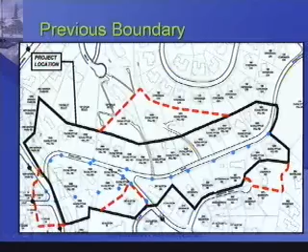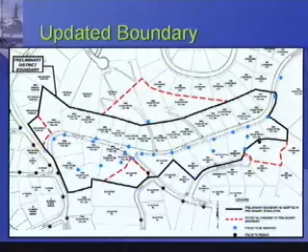I just want to make you aware of the potential of these boundary changes. Next time we meet, one of our goals is to have the assessment engineer's report updated, with the assessment engineer present, so we can talk about these assessment issues. But today's meeting, we're focusing on the utility design. Again, just want to make you aware of potential boundary changes, directly related to the assessment engineer's report.

Moving on to streetlights. As I mentioned, at the corner of Alston and Eucalyptus, there's an existing wooden pole with a cobra head attachment to the streetlight. If the project is approved and moves forward, it would be removed as part of the undergrounding and removal of the overhead system, and would need a replacement. It's at an intersection, so there's a need to have it replaced to illuminate the intersection for both vehicular and pedestrian crossing, as is the standard in the city.

The other streetlights shown are Marbelite or concrete poles with existing cobra head streetlights, and they would remain as is.

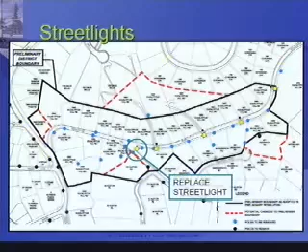So what we're talking about is the need to replace a light that would be coming down if the overhead utility system came down. The likely replacement style, subject to the review and approval of the ABR's jurisdiction, is the new Domus style. It's an efficient light with a cutoff lens that disseminates light downward, as opposed to the cobra head style which has side illumination. We're trying to have that light go downward to minimize light pollution and have more efficient lighting on the street.

So that's what's proposed, and again, it's subject to the approval of the ABR.

The good news is we've learned through the bidding process on the Cliff Drive project that it was cheaper to utilize the existing wire and convert the circuitry, as opposed to replacing it.

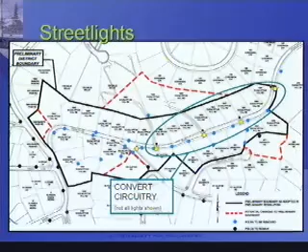With that, I'd like to turn it over to Jim Britch to let you know about the features of the design. I offer you to come to the back of the table here, so Jim can make his way through the utility design features.

Okay. Let's see. And okay, and okay. Well, we're gonna wait for just a minute till we convert to that sheet, but I will allow you to follow along. We have to convert the input to that sheet, and then we'll have to focus down.

I want you to look first. We've got this area here, right below all these hills. These houses are on the hill above Eucalyptus Hill Road, so their view plane is out in this direction. It's pretty steep. They do not see much of the street.

So when we're locating our meter pedestals, in this case this represents the meter pedestal that would allow the electricity used by the streetlights across the way to be metered and charged. That streetlight pedestal is being set down there.

Again, it's above Deer Path and below these residents, so it would be the least amount of view or aesthetic infringement possible. You've got a parking area alongside Eucalyptus Road where people can park. So what we intend to do is consolidate all the equipment that has to be above ground right there, and then probably put a couple bollards around it to protect it, maybe taking up half of one of those parking spaces. I know parking is at a real premium there.

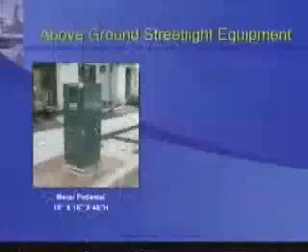I can show you what this particular meter pedestal looks like, as a streetlight pedestal. It looks like this. Essentially the electricity comes out of the underground, up into this meter, which has a disconnect here, etc. When the city charges this electricity, it pays its electrical bill, and the meter reader just reads it through this window. If electricians need to come out and work on the streetlights, they can go to this meter pedestal and disconnect the streetlights so they can work safely.

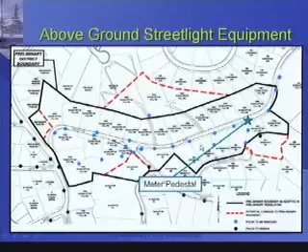The streetlights being fed by this across the way, the ones currently there, for you there would be really no change to the streetlights in this area. They'll look just the same, except they'll be run by electricity supplied this way instead of by this 6.6 circuit that comes clear over here from Barker Pass.

These streetlights would be fed from that meter pedestal. That's one piece of equipment being located there. It's the only thing you would see different in that area as we change those streetlights over.

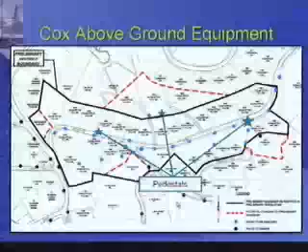With that, I want to go on to this view here, which I believe is our Cox above ground equipment. I'd like to mention to the neighborhood the reason we have to review these designs with you. Remember when Mr. Wagner first presented his SCE design, we had everybody take a look at that. There were some questions - can we do this, can we do that. A couple of individual property owners actually wanted the connection point for their property moved. Tom was able to change certain things and certain things he cannot change. When a property owner or the neighborhood makes a request to have something moved, relocated, or modified in some slight way, he has worked with you in the past to do that.

So once we got over that initial hurdle of sorting out the Southern California Edison design, Tom passed his design over to the Cox and Verizon people, and they looked at it from the same perspective, with an emphasis on minimizing any above-ground equipment they would have to install, and also on putting the demarcation points, the connection points for the Cox and Verizon equipment, right next to or as close as possible to the Southern California Edison connection point, so that property owners converting to underground would only have to put one trench on their property, and they could put all the conduits for the connection into that trench.

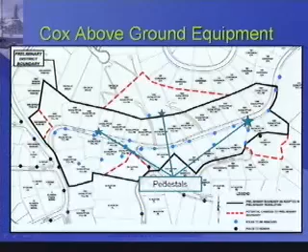So I'm going to look at this, and then I'll come over to that map in just a moment. I want you to notice this pedestal right here is a little bit larger - that's why Lisa has made this a larger star than these two. These two pedestals - let's go to the next slide, John - the two pedestals up there are Cox cable TV pedestals. They'll look just like that. They're very, very innocuous. When the technicians come out to work on this, they just pick this lid off the top, and then they can get all their equipment within this.

In working with the Cox planner, there is a possibility that this large pedestal would have to be located - and when I say large, notice it's only 48 inches high by 30 inches by 18. It's not that obtrusive. It would sit next to the streetlight pedestal that you saw previously in that same area. It's possible that it would be located where the parking area now exists on the portion of Eucalyptus Hill Road to the east of Alston Road. But Mr. Schwartzberg, the Cox designer, has told me that as he gets to the final design, he will attempt to replace this larger piece of equipment with a smaller piece, and feels there's maybe a 50-50 opportunity for him to be able to do that.

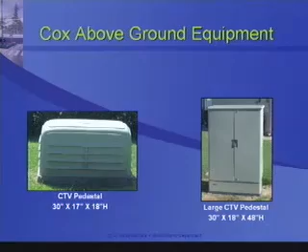So the point here, more than anything, is for you to understand the amount of effort and work that the Cox and Verizon planners put into this, minimizing any above-ground equipment for the neighborhood. Because we understand that the more we can get out of the visual view plane, the more suitable it's going to be for the neighborhood, and the more coordinated that's going to be with the goals of the neighborhood. I might also mention that Mr. Wagner, in his SCE designs, when plausible, put in vaults to put his equipment underground as opposed to above ground. But in some cases, you simply can't do that.

So, John, can we go back to the other map? This is the SCE above ground equipment, and we've looked at this at the last meeting. This, I believe, is a vault, and the stars here are a couple pieces of above ground equipment, transformer equipment that Edison has to have above ground. They have a lot of problems when they put this stuff in the ground, in vaults. If it's just a small piece of equipment, it's pretty costly to put that in the ground. And when they do put the vaults in the ground, you can see this would be the access to a vault here in the street. Then they have to have these air ventilation holes on the side also, which are a little bit visually intrusive - at least they're there, you see them.

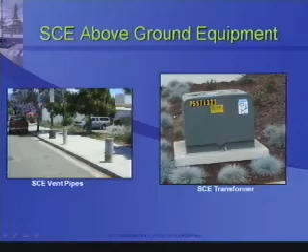Most of the SCE equipment we're representing with those smaller stars looks like this. We can landscape around it and disguise it in a number of ways, so it's very low, not huge above-ground equipment. The two vaults are here and here, and the smaller pad mount transformers are in these other areas with the other stars.

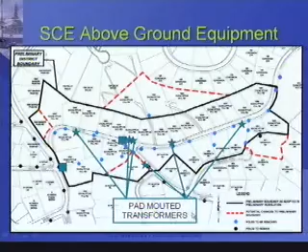Another good news for the neighborhood is that when we look at the Verizon design, I'll show it on this drawing over here. The Verizon design allowed them to put all of their equipment underground, which we were really happy with. They worked diligently to do that.

We're working with a designer out there named Chris Hakey. Chris worked on this and came up with a plan so all the above-ground equipment required for his system is outside of the neighborhood. So anything Verizon puts in, you will not notice. You might notice a small in-ground handhold, which is a connection point where a technician can raise the lid and get in there to connect and disconnect cabling, but that will all be below ground.

So with that, I want to step over to the map on the table and see if I can get Lisa to switch the input for the television viewers. I'll give you a run through. We can bring this down, and as we focus it, it becomes much more clear.

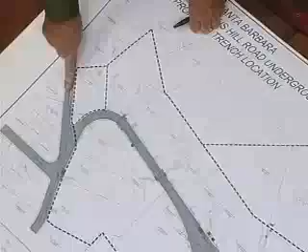A challenge for the Verizon people also was the Barker Pass Road area, and where Barker Pass intersects with Eucalyptus Hill Road. In this area, a lot of the circuits that come up here actually go out of the Chapala Street central office, so people living over here have a different phone prefix. This area, the area you live in, has the Montecito prefix, which is very desirable.

Verizon has worked very diligently to keep everybody in their existing telephone prefix, so that you would not have to change phone numbers.

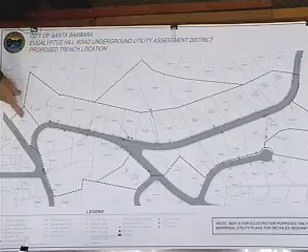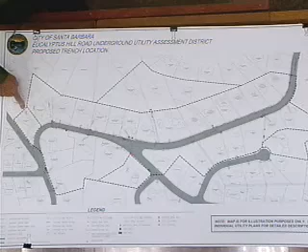There is a situation with a gentleman at 1840 Barker Pass Road. He has asked if he could convert or move his electrical feed. He currently feeds his electrical and telephone from Eucalyptus Hill Road, and he's asked if he can move that over to be fed from Barker Pass Road instead, and then be left out of the UUAD. I'm working with Mr. Wagner to determine what would be required.

He's currently fed his Cox cable from Barker Pass Road. But one ramification of that change would be that he'd have to change his phone number, because currently he's in the Montecito Exchange and he'd have to go into the Santa Barbara Exchange. That'll be part of his decision-making process.

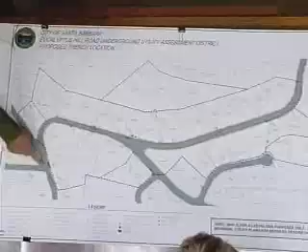I'm going to start on the westerly end of the project in this area here. This is the large vault that Edison will be putting in, right adjacent to Cedar Lane. Remember, all the circuits that feed electricity to this neighborhood come up Cedar Lane and are dispersed along this area, so that would be the transitional vault.

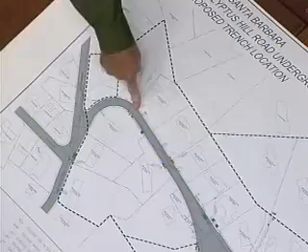That would allow the pole at that intersection to remain, but we would transition to underground, and the underground trench will feed that electricity underground around the corner and across the bridge to this area. Currently, that circuit is fed cross-country from here in a pole line that comes across and swings down like this, and that's part of the poles we're going to be eliminating.

So in this area, we would come with the undergrounding down across the bridge, and we would have a couple of mounts here.

Notice also it's a Verizon pull box and a Cox pull box. No above-ground equipment, really, just places where we can make these connections. We're coming across to this area, and each one of these little lines shows where the property would be connected to. When you see the T, it is a pull box or a handhold that the underground connects to.

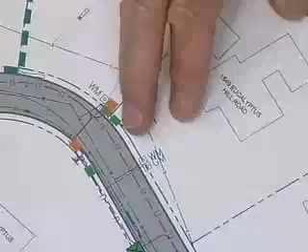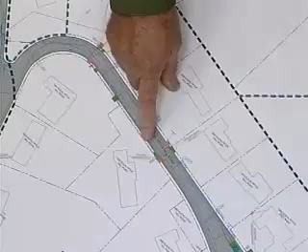For this house, should the project proceed, they would underground to that handhold, and that's where their conduits would meet the project conduits. We're going to go underground down here, and instead of crossing the street in numerous places, we also have a little underground run over on this side, with a couple SCE pull boxes or handholds along the way.

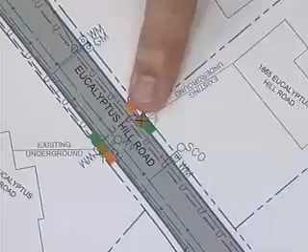So that's really the first place that we're going to see something above ground. We're proceeding down to this break-off with Alston Road and Eucalyptus Hill Road that proceeds this way. We notice here that we've got a large vault in the street that will allow us to make this changeover, and then we've got a couple pedestals here that we've talked about.

I know the property owners at 1865 have worked with Edison on that. They've talked to Edison and asked if there's any way that can be modified or changed, but unfortunately those pieces of equipment are going to have to set there because we've got so much equipment that currently comes into this pole across the street that we're removing.

Is there a possibility, let me know if I'm... Go ahead, yeah. Maybe putting these boxes near the property line. I see. Again, could you restate that?

My question was, why we would like to see the undergrounding go forward is that we hope the benefit to our property will exceed the assessment. So if we're spending all this money for a benefit, I'm beginning to question how much benefit I'm going to have by having a couple large green boxes, plus this vault, which is actually on my property, because I own part of the street here that is where the parking is. So I'm trading my view of the ocean for what everybody else is going to see when they look at the house.

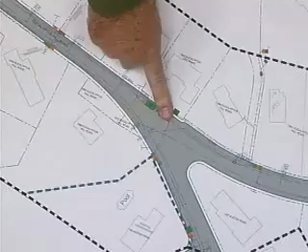If you look at this dividing point at Alston Road and Eucalyptus Hill Road, you'll note that we proceed across the street to Alston Road and down Alston Road to this corner. The streetlight shown right here will be replaced. It's on a wood pole now, and you'll see this much less obtrusive domus fixture that has downlighting, so we won't have a situation with that light radiating up the hills, this light pollution. We'll have that domus fixture installed there, and then this whole pole maze will come down.

These two poles are here, and we had talked about how we could gracefully treat this pole. This had been a question the neighborhood addressed in the past, and the solution is to come as far down Alston Road as we can, approaching Alston Place before we transition up. That gets, as opposed to just moving that pole 50, 70, or 100 feet, the conclusion was to come all the way down to the intersection, and that's where the district would end and the pole would go up.

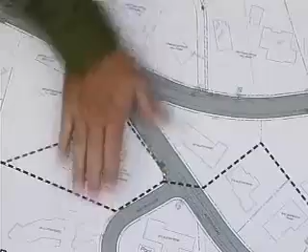That will be a partial benefit to 207 Alston Road because they'll have some of this clutter cleared out of the way, and all these properties up here will have this view perspective opened up to them. Mr. Wagner had that in response to neighborhood comments. That's not how he had originally designed it, but after listening to the neighborhood at the last meeting, those are changes he's been able to make that accommodate the neighborhood's desires.

If we look at how we proceed down Eucalyptus Hill Road going east towards Montecito, we have this road that runs up here, and a pole line that currently runs up next to 1895. That pole line carries the electricity that converts to underground at this point and then goes easterly down above this property line to feed all the houses downhill and uphill from there. This has been a very important pole for us to get out.

This area has been very important. There's no sense in taking these poles down if we're undergrounding, and then leaving that one pole standing. If we take this pole down, we have nothing to attach to. So, of course, we have to underground up this road.

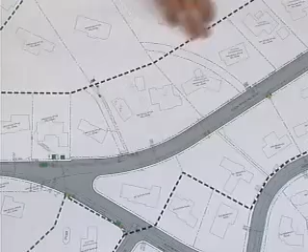We will intercept a current underground box that exists there and simply route into it to backfeed 1895, and to supply electrical and communication services to the properties above, and again reconnect all these properties down here to the circuit that's currently underground but fed by that overhead line. That's pretty straightforward, and you can see down here we have several pull boxes that will interface with that, but again, no above-ground equipment in that area.

At that point, we're going to cross the street because it'll be much easier to work on the lower, southerly side of Eucalyptus Hill Road, where we'll have that parking area, so we can have much less obstruction to traffic and much more area to work in.

We will proceed again easterly on Eucalyptus Hill Road towards Montecito, where each one of these purple stub outs you see, these little T's, will be replacing that overhead circuit and will allow the people on Deer Path to have that as their connection point.

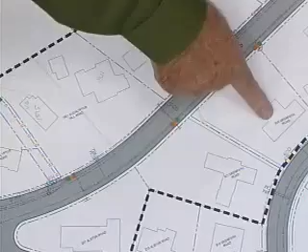Currently there are overhead wires running down there. There's a pole that sits down here that feeds a couple houses - I think it comes down like this and feeds these two houses. All that would be removed, and the new connection point would be up here in this area.

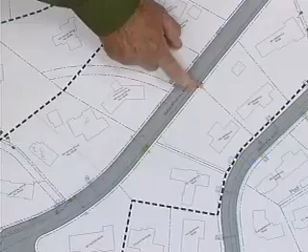Again, what we've done is locate that in such a way that we could consolidate, for example on this property line, all of the utilities in a single area and then Y out to feed the two houses. Again, nothing above ground there until we get down to this point.

This is where we have a pole line that runs between 1944 Eucalyptus Hill Road and 861 Deer Path Road. What that pole line does is come down the hill and feed 861, then goes down and connects to an underground box that runs over to 871 Deer Path Road.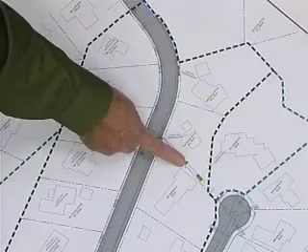That, of course, would all be undergrounded, and we would have other connection points. We'd do an intercept here to an existing underground, and have an intercept point there or a demarcation point where this residence, 361 Deer Path, could connect to. This whole pole line would come down.

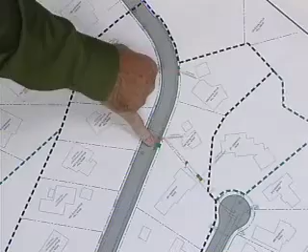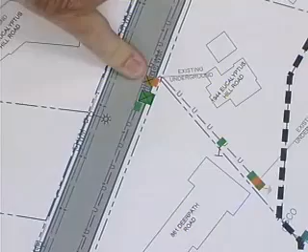We will have in this area, again, a couple pieces of above-ground equipment. We'll have an SCE pad-mounted transformer, one of the low green pad transformers, the smaller piece of equipment that was represented by Edison, a handhole, and the brown box here with the X in it represents that taller Cox Communications box that I said Mr. Schwartzberg is working on - he's hopeful but can't commit to it yet, so that could be a smaller box.

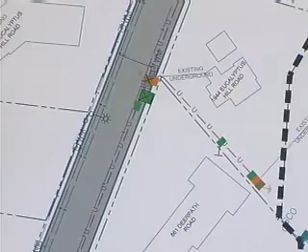But again, we like to present the worst case scenario. We'd hate to tell you it's going to be the small low box and later have to come back with the tall box. So right now it's designed for the taller box, but there's a possibility that would change. We would also try to locate our electrical meter pedestal somewhere in that area so we could consolidate that equipment and minimize the impact on the parking area here.

Then finally we would simply proceed down - again, this is the underground circuit as it comes down, feeding 1950 Eucalyptus Hill Road. Again, this is all below ground equipment, so the view plane as we came into this corner would have nothing above ground.

And obviously then we would proceed up Eucalyptus Hill Road to the last pole, and at that point, again, just several pole boxes. Remember what these pole boxes or handholes are again - places where technicians can get down into the ground and make and unmake connections to make the system work.

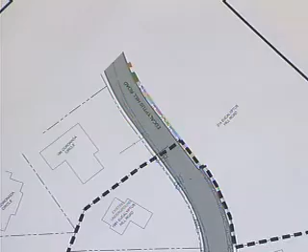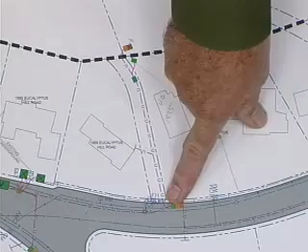What we're interested in from the neighborhood is input, and we believe we've had a lot of it with the Cox and Verizon design and the SCE design. An example would be this property at 1889 Eucalyptus Hill Road. They were originally going to connect down here, but the property owner talked to Mr. Wagner, and he was able to move that connection point. Since we have a trench open up this road, we'll move the connection point up here, making a shorter distance for them to connect.

And of course, doing that with Edison, it only makes sense to do the same with Cox and Verizon. Those are the kinds of changes the utility planners can make with neighborhood input. So if anyone viewing this on TV or our website has questions or concerns about where their connection points are located, we need to hear from you, because these are preliminary designs we're bringing to the neighborhood for approval and acceptance.

If there's something, like this point brought up about these boxes, that we could move to a property line or adjust in some way more in line with what the property owners and neighbors want, we certainly want to hear that. This isn't a take-it-or-leave-it situation. It's more like, here's our best effort—is there any way you can see that we could improve this?

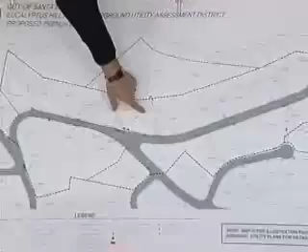Can I ask a question about that last topic? You're talking about running up through this concrete driveway between our house at 1895 and here, up to Ms. Brower's—this is the connection point you mentioned. Are they thinking of undergrounding on the east side of that concrete driveway and crossing through it to service Ms. Schwartz's property, or coming through the west side so they don't have to trench across the driveway where they're servicing Naomi's property?

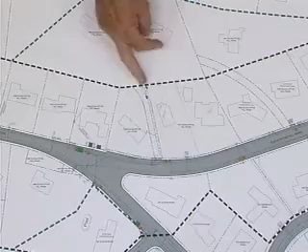That's a very good question. Let me tell you why it was planned this way. The boxes above the 1895 property are all on this side of the driveway, so at some point we've got to cross the driveway. When we cross here, because we're not carrying the primary circuits up the driveway, the trenching for those primary circuits would be much more significant than this one little trench to carry the individual service. We could have trenched on the westerly side, but then we'd have to make a bigger cut across the driveway at the top to connect.

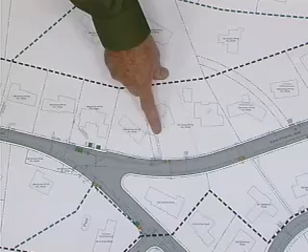So at some point we've got to cross the road to reach this box or service point, and the planners designed it so we'd have minimal impact and repair on that concrete driveway when we crossed. It'll trench on the eastern side in the dirt rather than disturbing the concrete. The only place it'll have to disturb concrete is where it crosses Naomi's.

That would be the desire—we'd hope to do that, to trench in the dirt whenever we can. We have to stay in the public right-of-way, because otherwise we'd have to go to the property owner and ask for an easement, since we'd be running utilities across their property to serve their neighbors. We're trying to avoid that, which is part of what the survey did—we wanted to make sure we stayed as much as possible in the public right-of-way.

Public right-of-way? I don't think so, I think that's private. Is it a private driveway? Okay, so then we'd have to get an easement for that. But the part where this would be dug in the earth, that's our property. Okay, you can have it.

And there is room in there. I'm off—watch out for the killer dog. Let's just do it. I apologize, I'm not being precise.

I know that the hill drops down a little bit, so that's where we would put the trench. We'd want to do it in a way that didn't erode or damage the landscaping, or cause further erosion. But that's the sort of thing we'll look at in the field.

Obviously, it's in the contractor's best interest to do it as inexpensively as possible. If he can refrain from cutting out concrete and then reinstalling it, that's going to be much less expensive, much less work, and much less troublesome for him. That's certainly the way it would be approached.

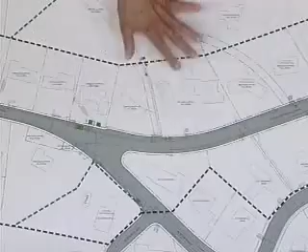Jim, could I ask, were you able to make contact with this property owner regarding what is being planned? Where are we here? We're upside down. Your home is here. Now, where's Mr. Inks? Here. Okay, I'm sorry, this property owner.

Browers is here. No, Browers is right here. Did you make any contact? We talked about this last time. We did, and I haven't yet. I'll tell you what I need to do.

As you know, the property owner there is elderly and it's difficult for her to understand exactly what's going on, especially by phone. I've visited with her a couple of times and talked to her in the past, but not recently. What happened, quite frankly, is that Michael gave me the number of her estate attorney, and I have not been able to make contact with that person.

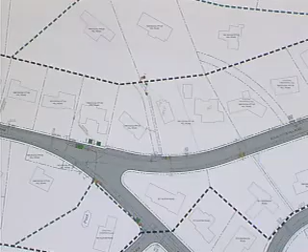What I intend to do is make contact with them after this meeting, have them view the meeting, and then go plan a one-on-one, 15-minute to half-hour session with them, just to be sure to explain everything so she's not left out.

I appreciate your concern for your neighbor. I think it's very realistic, and that is our job as facilitators, to communicate with everybody in the neighborhood. If we have a situation with an elderly person who doesn't understand all the ramifications and details, and sometimes simply doesn't want to be bothered, even though it's going to have a major effect, a major beneficial effect on her property, then we need to make sure she's informed. That pole comes down.

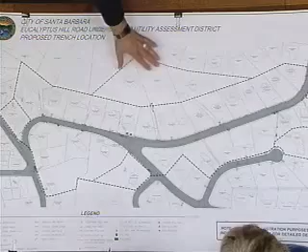Notice that pole right here that comes down will affect us. She's high enough above it that her view goes away. The people over here are way up above it. The only view they have is what used to be avocados, now a batting cage. So the only people who actually see the difference on that pole are going to be us, and maybe you. Yeah, I don't look in that direction that often.

I was going to point out, I know this person here, and she is very much adamantly opposed to this project for the very reason that just came up, which is they sit so high above that pole, there is zero benefit impact to them. So it is really to our disadvantage as a UUAD to incorporate properties that have no visual benefit whatsoever.

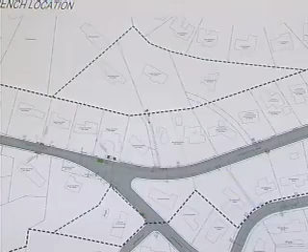Except the pole sits on her land. So if the assessment engineer is recommending that these three be involved because removing this pole is of benefit, it's really a disadvantage to the whole UUAD, because none of these will vote for this project since there's no visual benefit whatsoever to any one of those three.

I'll defer that discussion to our next meeting when we plan, as John noted, to have the assessment engineer here. Remember, the assessment engineer is the person that draws the property lines, and she can best explain and discuss that with you as to why that is or is not necessary.

Oh, and we could also. I'd like her number, I'd like to talk with her. The assessment engineer? Oh, okay.

Incorporated, because this black line was the line of the neighborhood that supported the idea of doing this. She created these three, and again, it's not to our benefit, but it looks like they're putting...

Equipment on this property, so they've got to be in the district. Otherwise, they aren't going to put equipment on there. They can't. Well, there's a right of way. There's got to be a right of way.

If I may just interject, it's the assessment engineer's responsibility to make the determination as to who is obtaining the benefit. It's a requirement of Proposition 218 that we must abide by the law, and the assessment engineer is an independent party — that's their role. So I hope we don't get into a debate tonight about that, because we're planning to have that type of discussion at our next meeting.

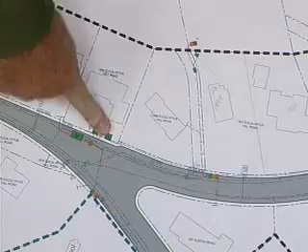Okay, and what is the size of those boxes? Because on the slide it didn't indicate. They did on some of them, but not on those SCE pads. I'm not sure we had the actual dimensions on it, even though we did have a picture of it earlier. I'll tell you what, we'll come back to that.

What was your third question? My third question is, this is our garage — yes — our driveway then comes down off the garage. Is this box in the way of our driveway, and if so, is it going to need to be moved, or how does that get handled?

And then the last question is, we have this parking area in front of our house that's at street level, and the rest of our yard is elevated. So is this in the parking area, or is it in the yard?

Well, I think those are reasonable questions, and since they're oriented towards one specific property in the neighborhood, I'm going to ask that we move on with the meeting and that Tom address those immediately afterwards. That be okay, Tom? Yeah. Okay.

What do you think, John? Do you want to, since it...

Also a reminder, this is kind of for illustration purposes, so the box can actually be right here. Well, I'm not putting it in your living room. Yes, just a little shifting.

You all know Tom Wagner? Mr. Wagner is the planner for Southern California Edison. Well, thank you, Jim.

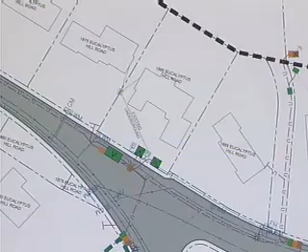Now, your question earlier was if these could be moved. Certainly, we can move it to the corner of the property. That's fine, as I recall, it's been a few months.

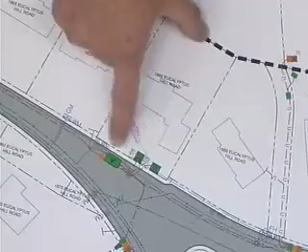You have a retaining wall. Yes, the wall is right there. See, our fee line actually comes down here, like that. This is actually our fee here. You have a little area that's a parking area right by the stop sign, and that's where we propose to put the vault.

Can one park on top of the vault? Certainly. If we have to get in it, we'll try to make contact with you and have the car moved if we need access.

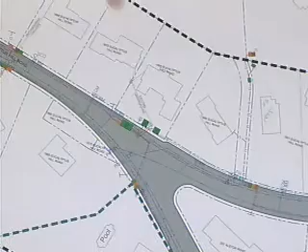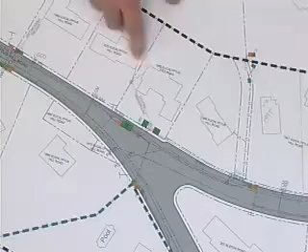The only thing I wanted to mention was that, as you recall, you come from a feed across the street to your pole. Then down the pole is a little ground box or handhole that feeds you, and then it feeds the neighbor - it feeds a handhole here, then feeds both of you. So there's a buried handhole at the base of that pole that I couldn't locate. So from the transformer, you'd have to dig a trench from wherever the transformer is back to the handhole to pick up your two homes. Other than that, you can certainly move it over here.

That's not a problem, that'd be much - sure. We don't want to move our driveway. We don't want you doing that.

Okay, the other question or comment was about this private driveway. Yes, I believe this is a private road, not a public right-of-way, so we would have to ask for an easement from whoever owns the property. It's three properties - partly ours, partly Naomi's, and I believe the stub out, the extension down to Eucalyptus Hill Road, is Brower's. So it covers three different lots.

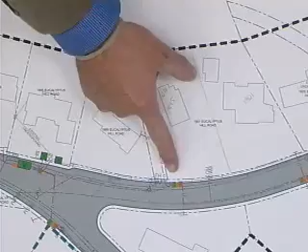We would have to ask for an easement, and Jim was right - we would like to trench on earth rather than concrete. And I know you have some ice plant or some sort of planter on one side. And then this is a new box.

And then there's a pole here, as you all know. At the base of that pole is a meter panel. Does that serve this house right here, 1895?

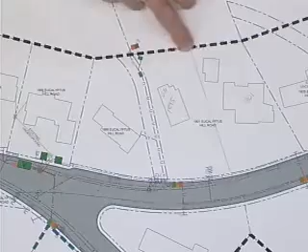As Jim mentioned, the high voltage comes along the property line and feeds transformers back here to feed these homes, and also feeds a Coronado Circle. Then as part of that system, when they put it in back in the 60s, they ran a low voltage line back here to what's called a service pedestal to pick up this home, and I believe this home at the corner, which was an avocado field at the time.

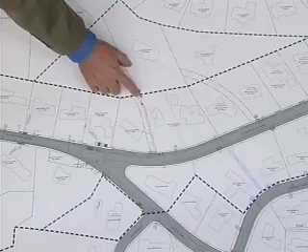So this design picks up all of those feeds: transformer here coming up low voltage to feed 1889, low voltage and high voltage in the same trench to this box to pick up your service and also pick up the high voltage.

Great, well let's see if we can move on. But that's exactly the intent of these meetings, and exactly the intent of the city as a facilitator - to bring the neighbors and property owners together with the planners so we can address concerns like that and see if something can be worked out that's more conducive to everybody's happiness. So thank you, and with that I'll turn this back over to Mr. Wozniak. Thank you, Jim.

I'd like to move on to an update of our assessment engineering issues. When we sent out the notice two weeks ago, we had planned on having the assessment engineer here today and planned to give you a new sheet with calculations to let you know the latest information. But just this week, we got an interesting discussion with the assessment engineer, and there's some new litigation going on that the assessment engineer is working on and determining how it may impact this underground utility assessment district.

We have to ensure we are in compliance with the law, and this new litigation is what she's investigating. We'll be looking at our assessment criteria and ensuring, before we give you numbers, that we are gaining confidence that they're as accurate as possible. I'm sorry it's taking a little longer than everyone hoped, including myself, but we need to ensure we're in compliance with the law and have the best information available to share with you.